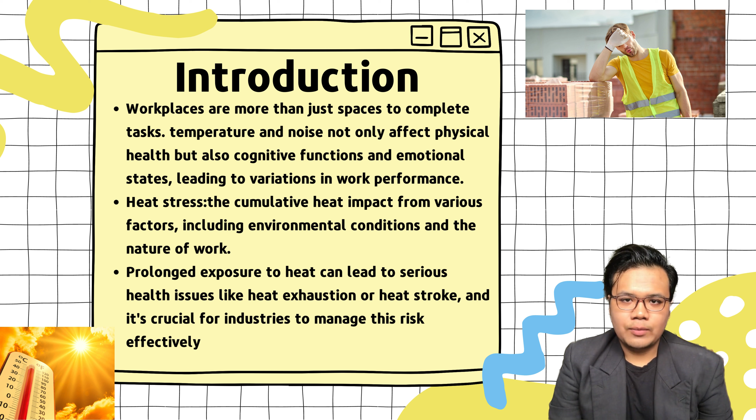Workplaces are more than just spaces to complete tasks. Temperature and noise not only affect physical health but also cognitive function and emotional states, leading to variation in work performance. Heat stress is the cumulative heat impact from various factors, including environmental conditions and the nature of work. Prolonged exposure to heat can lead to serious health issues like heat exhaustion and heat stroke, and it's crucial for industry to manage these risks.

The wet bulb globe temperature (WBGT) is a key tool in assessing heat stress. It considers air temperature, humidity, wind speed, and radiant heat. Excessive noise can lead to hearing impairment, increased stress level, and reduced concentration. The study highlights a growing concern with noise-induced hearing disorder in the manufacturing sector.

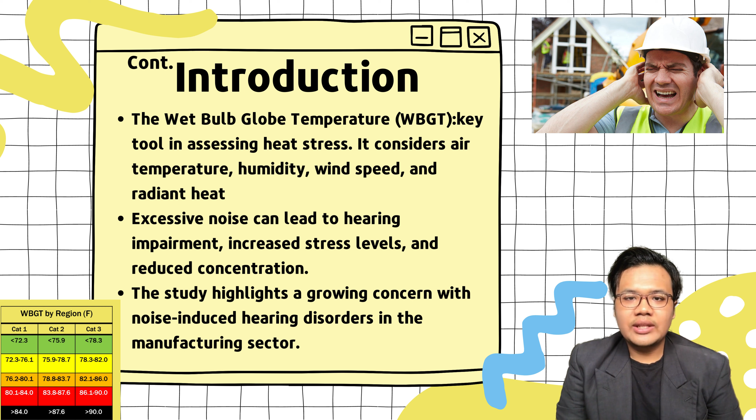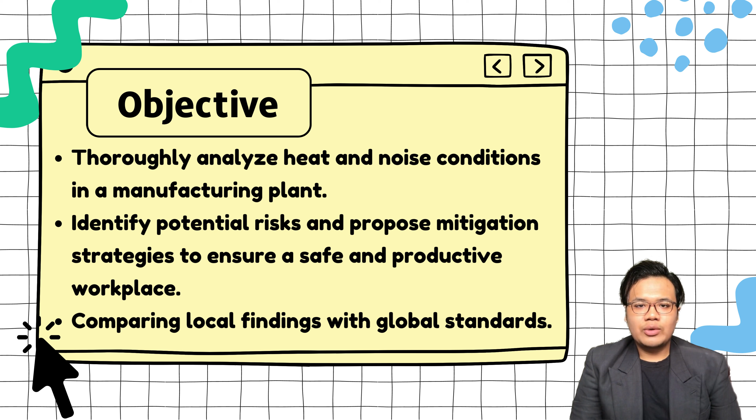The objective of this study is to analyze heat and noise conditions in a manufacturing plant, identifying potential risks and proposing mitigation strategies to ensure a safe and productive workplace, and comparing local findings with global standards.

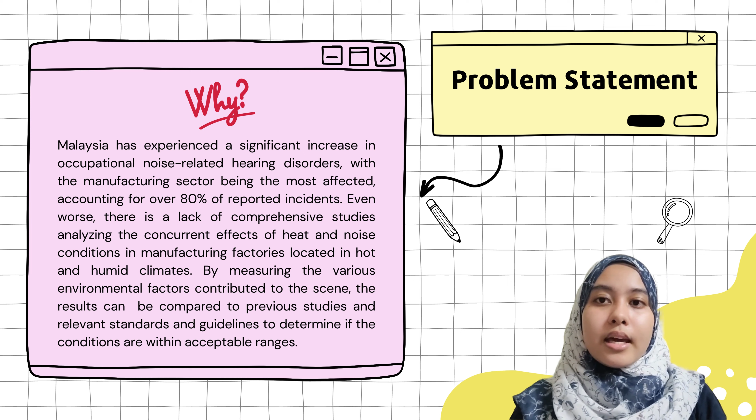Worse yet, there are no comprehensive studies that analyze the simultaneous effects of heat and noise conditions in manufacturing factories located in hot and humid climates. Therefore, by measuring the various environmental factors which contribute to this, the results can be compared to previous studies, and relevant standards and guidelines can be used to determine if the conditions are within the acceptable ranges.

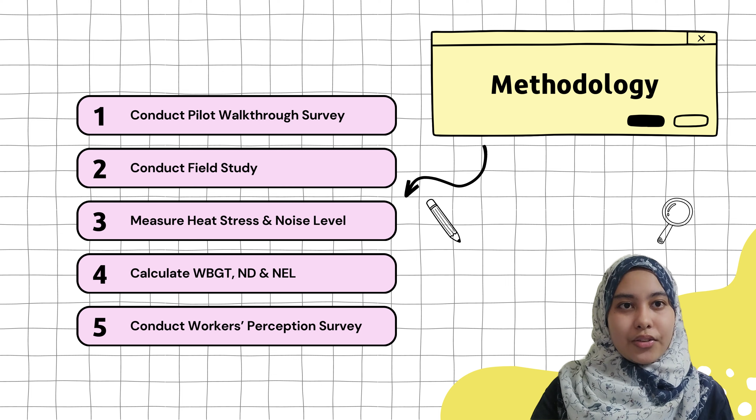Moving on to the methodology, there are 5 stages taken by the research team: conduct a pilot walkthrough survey, conduct a field study, measure heat stress and noise level, calculate WBGT, ND and NEL, and lastly conduct a workers' perception survey. The pilot walkthrough survey was carried out approximately a month prior to the actual assessment, and this step allowed the research team to identify the locations where the data was collected.

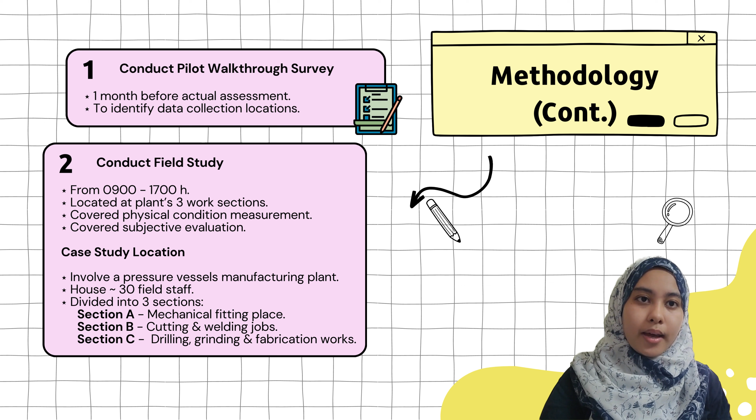After receiving permission from the factory management, the team proceeded to carry out the field study at the manufacturing plant for pressure vessels. This encompassed both physical condition measurement and subjective evaluation, and it was carried out at the plant's 3 work sections, namely Section A, Section B, and Section C, from 9 a.m. until 5 p.m. In the next crucial step, measurements of heat stress and noise level were both collected at 1-minute intervals.

For the heat stress, a digital climate measuring instrument was utilized, linked to 3 sensor probes. Consequently, 3 thermal parameters including air temperature, relative humidity, and air velocity were acquired. The research team also followed the DOSH guidelines by positioning the instrument about 1.1 meter above the floor level. Meanwhile, the noise level inside the factory was recorded using a sound level meter which complied with the IEC Class 2 standard. To ensure accuracy, the meter was placed close to where the mechanical work was performed.

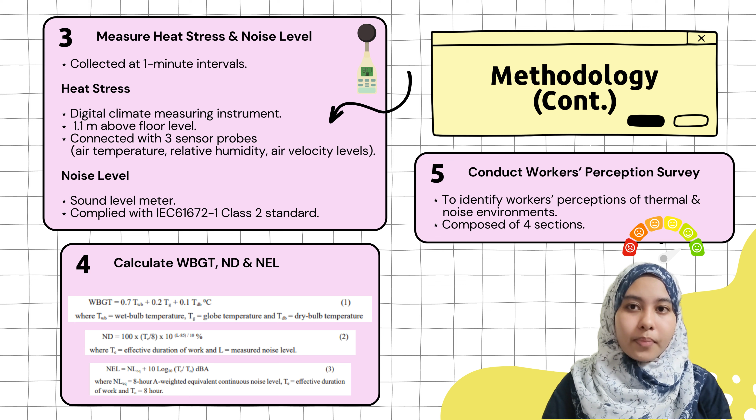Next, the calculation of WBGT, ND, and NEL were carried out in accordance with their specific formulas displayed on the slide. In the final stage, the research team conducted another survey centered on the workers' perceptions of their thermal and noise environments. Unlike the first survey, this one has 4 sections, and the questions in the survey form were developed by referring to DOSH itself.

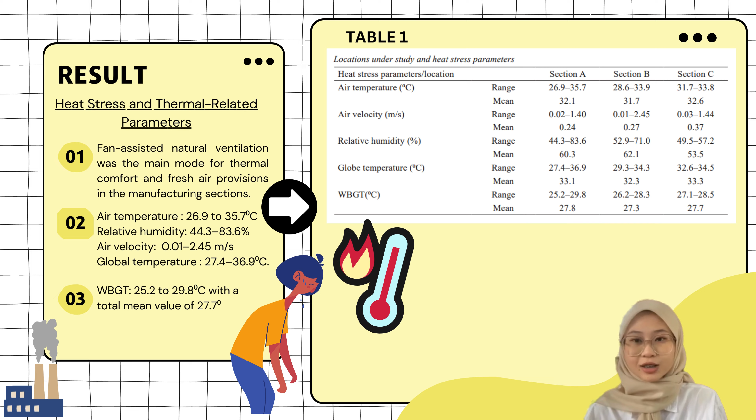For the second result, the passage described the noise level in the plant during working hours ranging from 40.4 to 111.4 dBA, with the highest level occurring in section A due to mechanical fitting works. The background noise remained below 45 dBA despite the difficulty in predicting noise levels in such a workplace. The results indicate that the noise levels were generally below the 85 dBA threshold limit specified by DOSH for over 80% of the work time.

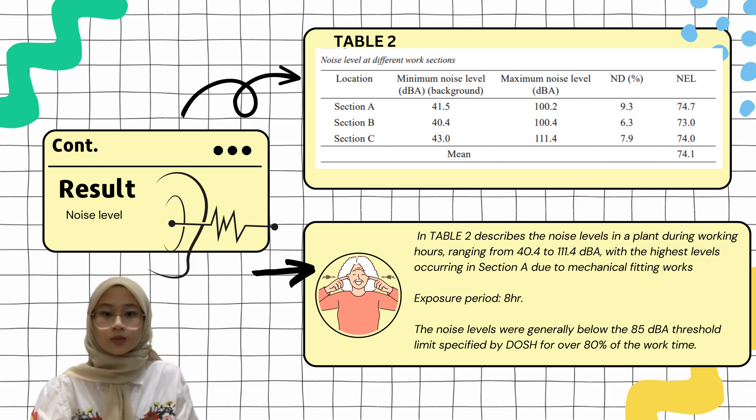The workplace is deemed acoustically safe for workers, with the calculated mean noise exposure level NEL of 74.1 dBA over an 8-hour exposure period, and the noise dose ND of workers ranging from 6.3 to 9.3%. A survey involved 25 male skilled workers with full-time roles, generally in good health and performing light work. For safety, 64% of those in hot work wore protective gear, while others in various roles wore lighter clothes.

More than 65% found the workplace air temperature acceptable, and 80% felt the humidity was comfortable. While most of the workers were content with the thermal environment, 76% of the welders felt it was warm, and 24% described it as hot. The radiant heat was perceived, but without the risk of contact burns.

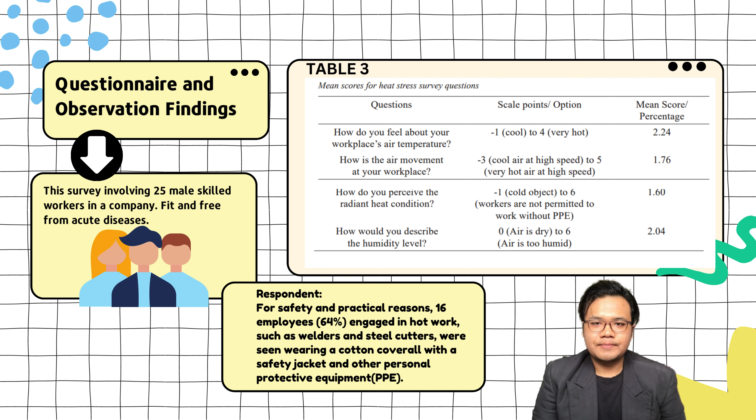In hot and humid regions without air conditioning, higher airflow rates are recommended for comfort, with ventilation fans helping maintain core body temperature. In a survey, 56% of workers in cotton coveralls and jackets felt the air was still in a warm environment. Others described it as warm at low speed, which is 19%, or in a hot environment, 25%. Similar responses were observed in the workers in lighter clothes, with 75% feeling low air movement. The survey's timing and location may have influenced workers' perception.

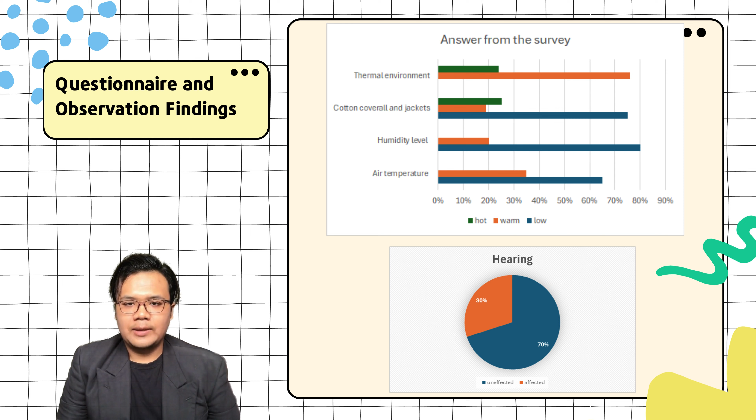Additionally, 75% feel their... In discussion one, the survey found that most employees were comfortable with the temperature in their workplace. Regarding the perception of air movement, one reason for feeling low air movement could be the type of clothing worn by respondents. Additionally, working in an area with a lot of equipment and material may have contributed to this perception.

The use of stationary pedestal fans to create airflow means that workers might feel a difference if they move around without adjusting the fan direction.

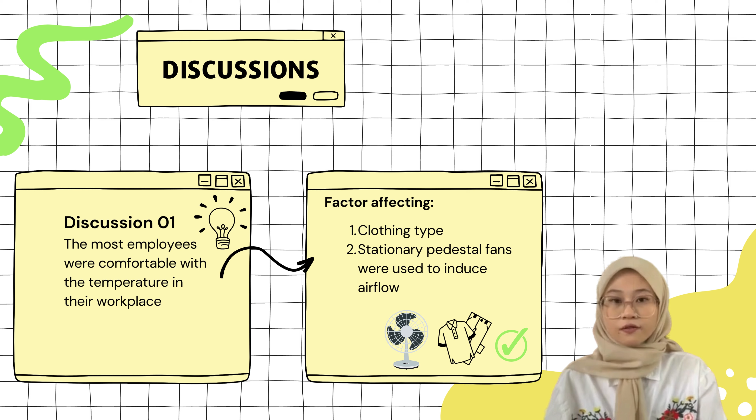For the second discussion, the workplace studied is partially enclosed and naturally ventilated, and the recommended threshold limit value for wet bulb globe temperature is 28 Celsius according to ISO 7243. Field measurements show that the higher WBGT readings, 29.8 Celsius, 28.3 and 28.5 Celsius, occur mainly during the lunch break when the outdoor temperature was high.

Despite this, the average WBGT values were below the recommended TLV, suggesting that workers were not exposed to excessively high temperatures causing heat stress during their tasks. Compared to earlier studies, the WBGT values in this workplace were much lower even during warm conditions.

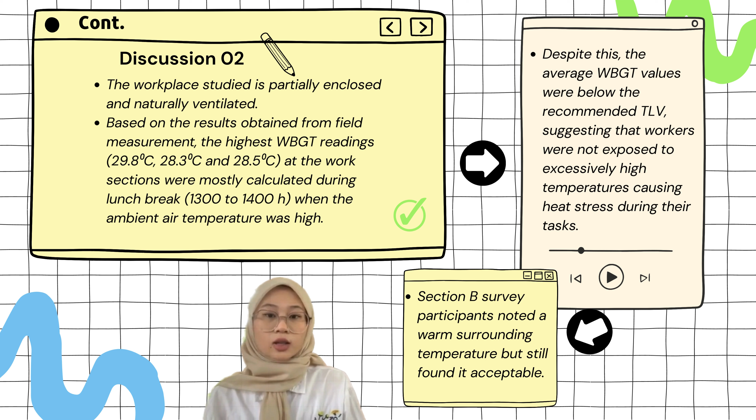Section B survey participants noted a warm surrounding temperature but still found it acceptable. This could be because workers, especially those with extended exposure, tend to adapt to their work environment over time. The study did not consider personalized evaluation of heat stress level, but focused on analyzing field data based on selected locations and mean scores from heat stress survey questions.

Next, for the third discussion, the measured sound levels indicate that the NEL did not go beyond the allowed 85 dBA for an 8-hour period, as regulated by the 2019 Noise Exposure Regulation. The daily noise dose was also well below the limit of 100%. This was mainly because activities generating high noise occurred only briefly during the study. The loudest noise happened when hammering and heavy machinery were used simultaneously, but this occurred for a very short time.

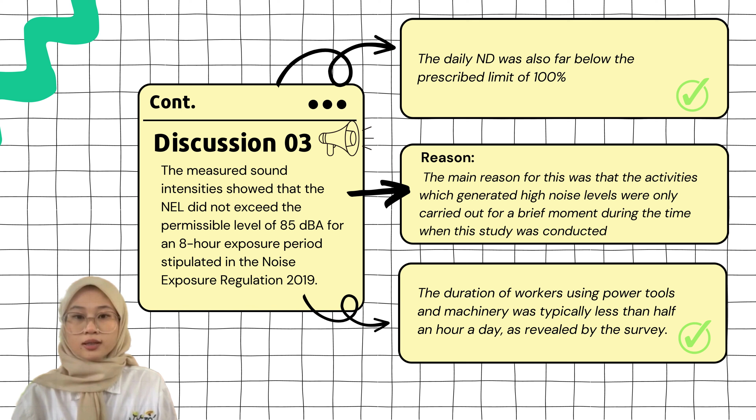Machines and tools had less impact on the background noise, possibly due to large openings in the plant that dispersed the noise. The duration of workers using power tools and machinery was typically less than half an hour a day, as revealed by the survey. Most respondents did not report any noise-related issue or hearing impairment, likely attributed to the generally low noise level in the plant and use of personal auditory protectors during noisy work.

Let's proceed with mitigation strategies for heat stress. First, the manufacturing plant or company can implement engineering controls such as improved ventilation and cooling systems to reduce heat stress in identified hotspots within the manufacturing plant. Next, they can also provide regular training sessions for employees on heat stress awareness, preventive measures, and the importance of hydration. Also, they can establish a proactive monitoring system for heat stress, including regular assessments of environmental conditions and employee well-being.

So, how can manufacturers reduce noise exposure? They can introduce engineering controls like noise barriers or enclosures to minimize noise levels at the source. Next, they can encourage the use of PPE such as earplugs or earmuffs for employees working in high noise areas, and they can rotate employees through different tasks to limit prolonged exposure to high noise levels.

In the aspect of health and safety education of employees, they can conduct regular health and safety training programs to increase awareness among employees about the risks associated with heat stress and noise exposure. They can promote a culture of reporting and addressing concerns related to health and safety hazards.

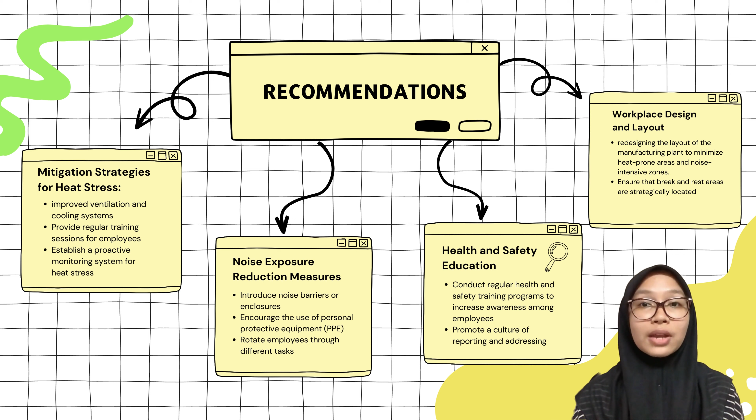Last but not least, in terms of workplace design modification, they can consider redesigning the layout of the manufacturing plant to minimize heat-prone areas and noise-intensive zones. Also, they can ensure that break and rest areas are strategically located to provide relief from both heat and noise.

In conclusion, this study systematically measured and analyzed a manufacturing plant's heat stress and noise levels. The field measurement data showed that the heat stress and noise exposure levels were generally below the stipulated limits of the guidelines, which suggested that the locations under study were safe and comfortable for the workers. By addressing these issues through a combination of engineering controls, employee education, and workplace design modification, the organization can create a safer and more comfortable working environment.

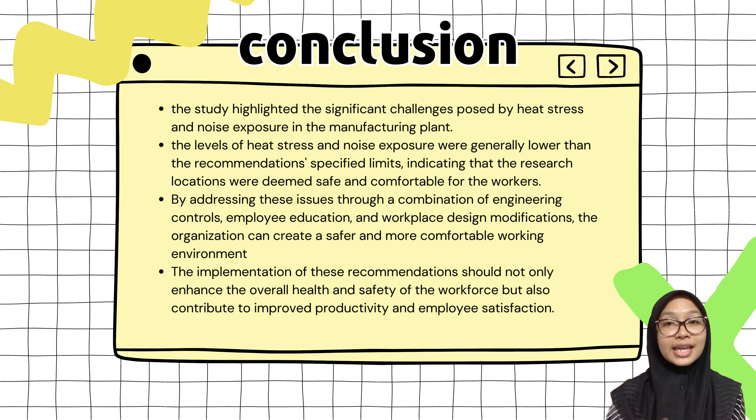Ongoing monitoring and continuous improvement efforts will be essential to ensure sustained effectiveness in reducing heat stress and noise exposure levels. Putting these suggestions into practice should boost worker happiness and productivity in addition to improving the general health and safety of the workforce.